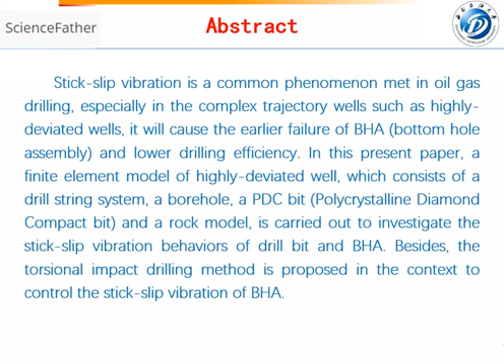Stick-slip vibration is a common phenomenon in oil and gas drilling, especially in complex trajectory wells such as highly deviated wells. It causes earlier failure of BHA and lower drilling efficiency. In this paper, a finite element model of a highly deviated well, consisting of a drill string system, a borehole, a PDC bit, and a rock model, is used to investigate the stick-slip vibration behaviors of the drill bit and BHA. Additionally, a torsional impact drilling method is proposed to control the stick-slip vibration of BHA.

Nowadays, the highly deviated drilling approach is widely used in oil and gas drilling. It breaks the limitation of drilling space, especially in offshore and beach oil exploration, and has the merits of low drilling costs and high economic benefit. A highly deviated well is a directional well where the ratio of well length to vertical well depth is larger than 2, and the deviated angle ranges from 55 to 85 degrees.

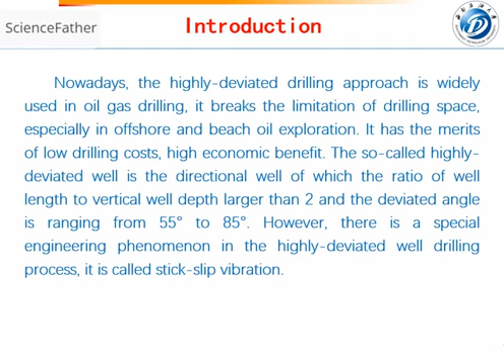However, there is a special engineering phenomenon in the highly deviated well drilling process called stick-slip vibration. That is, the drill bit stops rotation because the torque transmitted from the rotary table through the drilling string is not enough to break the bottom hole rock within a certain period of time. Subsequently, as the rotary table keeps rotating and the torque keeps transmitting to the drill bit, it abruptly rotates once enough energy is stored in the drilling string to break the rock. Stick-slip vibration of the drill string is this bit-stalling and continuous-rotation alternating cycle.

When the bit suddenly rotates, the rotation speed and acceleration are usually higher, leading to early failure of the drill bit and BHA, and causing low quality of the well borehole. It is therefore significant to investigate stick-slip vibration control approaches for improving the ROP and reducing drilling costs.

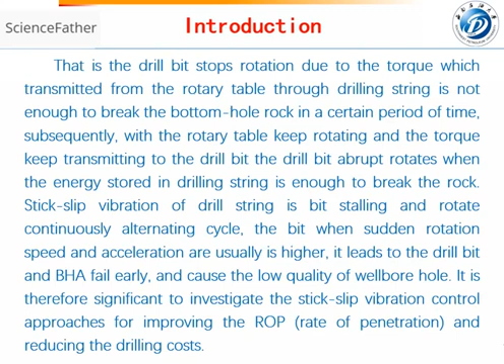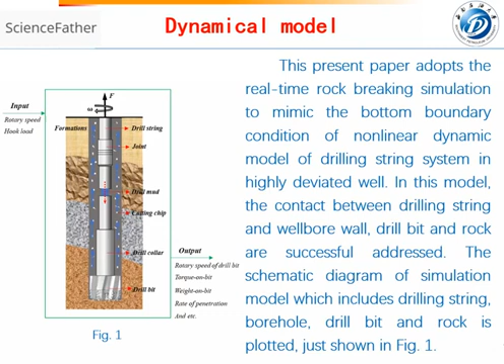This paper adopts real-time rock breaking simulation to mimic the bottom boundary condition of the nonlinear dynamic model of the drilling string system in a highly deviated well. In this model, contact between the drilling string and the wellbore wall, and between the drill bit and rock, are successfully addressed. The schematic diagram of the simulation model, including drilling string, borehole, drill bit, and rock, is shown in Figure 1.

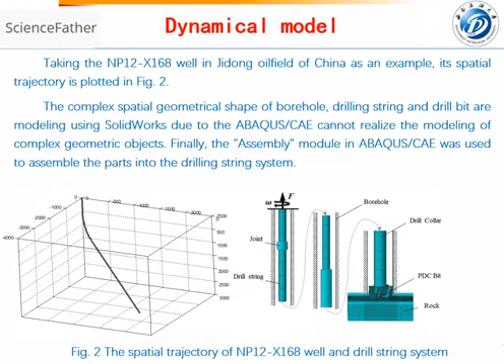Taking the NP12-X168 well in Jidong oil field of China as an example, its spatial trajectory is plotted in Figure 2. By comparing with the field monitoring data, it can be concluded that the dynamic finite element model of the highly deviated well established in this paper has certain accuracy and rationality, and can reasonably reflect the dynamic characteristics of the drill string in the actual drilling process of a highly deviated well.

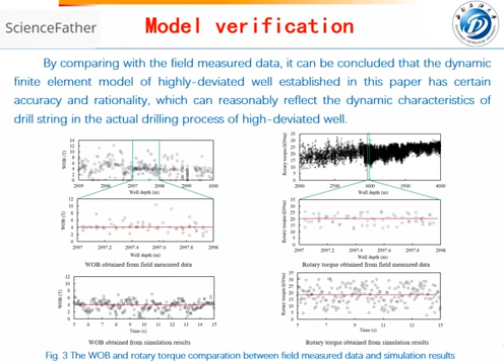When the rotation speed of the drill bit equals or is less than 0, it means the drill bit is in the stick state. During the slip state, the PDC cutter will suffer violent impact loading due to the high rotational speed of the drill bit, causing earlier failure of the cutters. Meanwhile, torque keeps transmitting to the drill bit from the rotary table, and energy is stored in the drilling string before the next slip state happens.

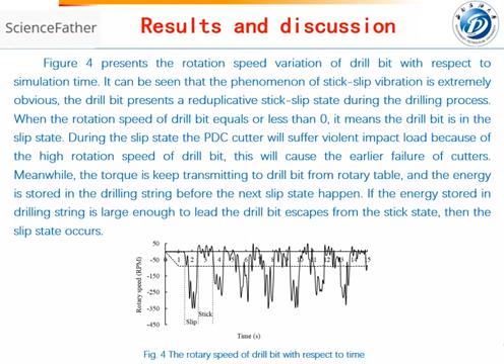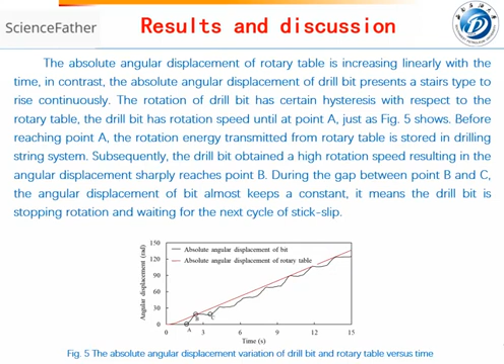If this energy stored in the drilling string is large enough to let the drill bit escape from the stick state, then the slip state occurs. The absolute angular displacement of the rotary table increases linearly with time. In contrast, the absolute angular displacement of the drill bit presents a stair-step rise. The rotation of the drill bit has certain hysteresis with respect to the rotary table.

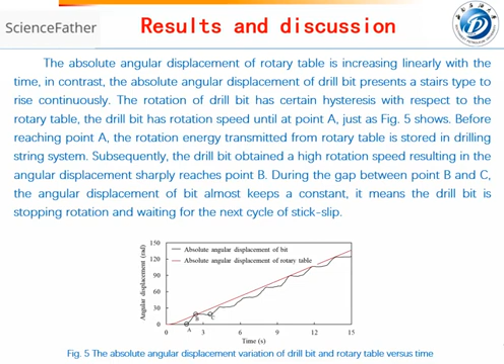The drill bit has no rotation speed until point A, as Figure 5 shows. Before reaching point A, the rotation energy transmitted from the rotary table is stored in the drilling string system. Subsequently, the drill bit obtains a high rotation speed, causing the angular displacement to sharply reach point B. During the gap between points B and C, the angular displacement of the bit almost keeps constant, meaning the drill bit has stopped rotation and is waiting for the next stick-slip cycle.

The drilling string has small deformation at the beginning of rotation, and a large deformation takes place in the subsequent rotation. It almost presents a helical buckling deformation due to the torque transmitted from top to bottom of the drill string. A large part of the energy causing stick-slip vibration of BHA is stored in the drilling string system, and this energy is the main reason for the drilling string deformation.

When the drill bit is in the stick state and without rotation, the energy stored in the drilling string system increases and the drilling string deformation becomes more obvious. In contrast, when the stored energy is released in the slip state, the drilling string deformation will be reset.

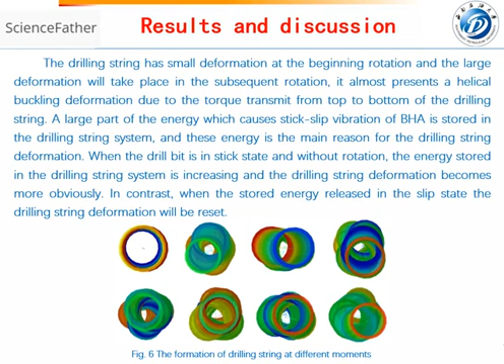Figure 7 shows the lateral acceleration variation of the drill bit with respect to simulation time, including two directions, x direction and y direction. The vibration of BHA is very complex, with different types of vibration mixed together, such as lateral vibration, axial vibration, torsional vibration, and whirling motion.

Generally, the vibration of BHA is extremely intensive. It has a great influence on the BHA working life and the wellbore stability. Figure 9 shows that the maximum lateral vibration is nearly 30 G.

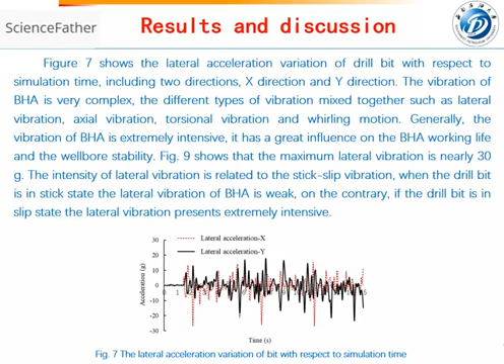The intensity of lateral vibration is related to stick-slip vibration. When the drill bit is in stick state, the lateral vibration of BHA is weak. On the contrary, if the drill bit is in slip state, the lateral vibration presents extremely intensive.

Figure 8 plots the penetration depth of drill bit with respect to simulation time. The penetration depth presents a stairs-type continuous rise, just like the curve of absolute angular displacement of drill bit in Figure 7. In stick state, the penetration depth is hard to increase and almost keeps to a constant.

However, the penetration depth sharply increases in slip state of drill bit. That means the stick state of drill bit has no contribution to the rock breaking process and will decrease the drilling efficiency. Hence, the effective drilling time should be increased by reducing the period of bit sticking in the actual drilling process.

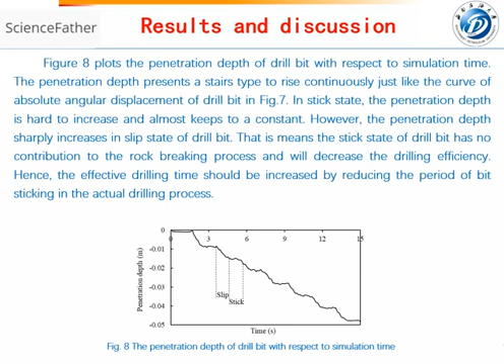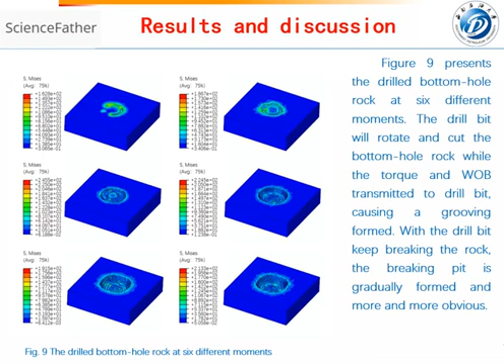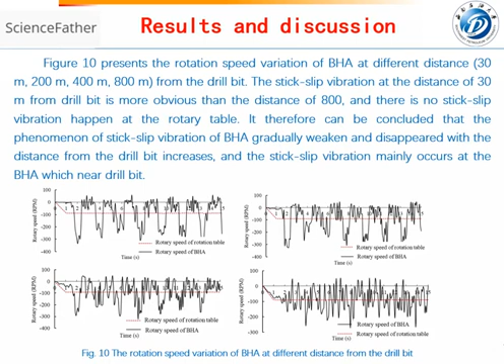30 meters, 200 meters, 400 meters, and 800 meters from the drill bit. The stick-slip vibration at the distance of 30 meters from drill bit is more obvious than the distance of 800 meters, and there is no stick-slip vibration happening at the rotary table. It therefore can be concluded that the phenomenon of stick-slip vibration of BHA gradually weakens and disappears as the distance from the drill bit increases, and stick-slip vibration mainly occurs at the BHA which is near the drill bit.

Figure 11 shows the mises stress and flexural moment nephogram of BHA. The mises stress nephogram illustrates the top drilling string suffers tensile load and BHA suffers compressive load. The flexural moment nephogram presents that the maximum flexural moment occurs at the BHA which is near the drill bit. It also means the BHA is prone to fracture.

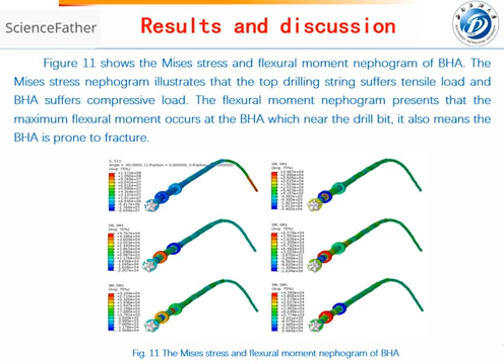Figure 12 illustrates the rotation speed variation of drill bit in torsional impact drilling and traditional drilling with respect to simulation time. The stick-slip vibration is weakened in torsional impact drilling compared to the traditional drilling. The maximum rotation speed in torsional impact drilling is 262.2 rpm and it is 350 rpm.

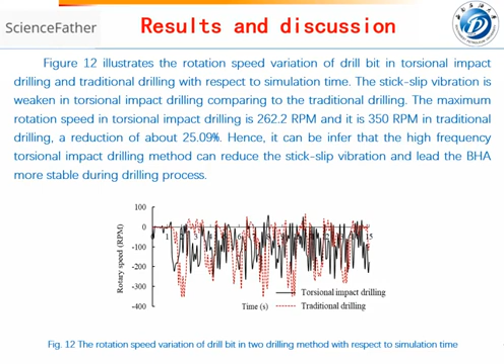In traditional drilling, a reduction of about 25.09%. Hence, it can be inferred that the high-frequency torsional impact drilling method can reduce the stick-slip vibration and lead to the BHA being more stable during the drilling process.

Figure 13 shows the angular displacement variation of drill bit in torsional impact drilling and traditional drilling. Comparing to the angular displacement curve of traditional drilling, the angular displacement curve of torsional impact drilling presents more smooth. The stairs-type continuous rise is not obvious. It also indicates that the torsional impact drilling can reduce the stick-slip vibration and lead the BHA to be more stable during the drilling process.

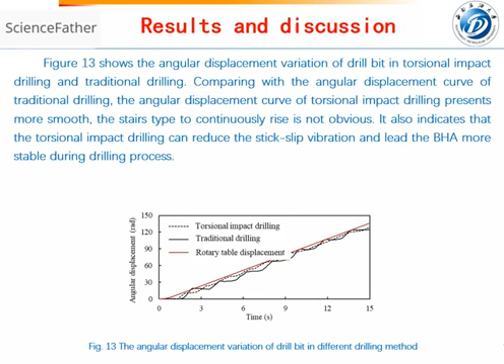Figure 14 presents the resistance torque of drill bits in torsional impact drilling and traditional drilling. The resistance torque of drill bit is reduced obviously in torsional impact drilling compared to the traditional drilling. The maximum resistance torque is reduced from 27.8 kN·m to 17.4 kN·m while using the torsional impact drilling method.

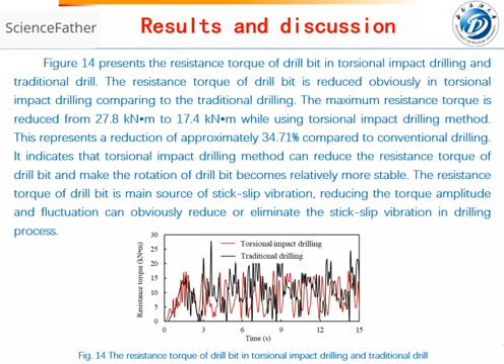It presents a reduction of approximately 34.71% compared to conventional drilling. It indicates that the torsional impact drilling method can reduce the resistance torque of drill bit and make the rotation of the drill bit become relatively more stable. The resistance torque of drill bit is the mainly source of stick-slip vibration. Reducing the torque amplitude and fluctuation can obviously eliminate the stick-slip vibration in the drilling process.

Figure 15 shows the comparison of penetration depths of drill bits in torsional impact drilling and traditional drilling. In torsional impact drilling, the penetration depth curve presents a linear growth with respect to simulation time. It is different from the stairs type of continuous rising in traditional drilling. It also can be seen from the figure that the rate of penetration in torsional drilling is larger than it is in traditional drilling. Torsional impact drilling increases the drilling depth by about

58.28% compared to traditional drilling. This means the torsional impact can effectively improve drilling efficiency.

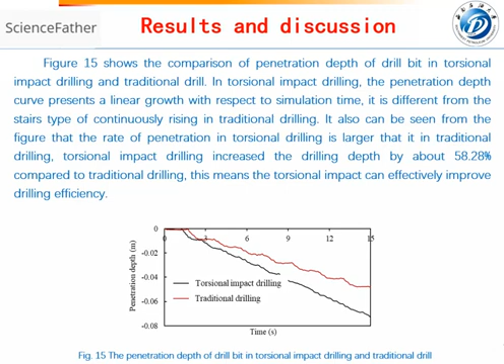The research results show that the phenomenon of stick-slip vibration of BHA gradually weakens and disappears with the distance from the drill bit increasing, and the stick-slip vibration mainly occurs at the BHA which is near the drill bit.

The high-frequency torsional impact drilling method can reduce the resistance torque of the bit by 34.71% and increase the drilling depth by about 58.28%. It can effectively improve the drilling efficiency of the bit, making the rotation of drill bit become relatively more stable, and reducing or even eliminating the stick-slip vibration.

These results lead to an enhanced understanding of stick-slip vibration behaviors of drill bit and BHA in highly deviated wells and provide the basis for improving the drilling efficiency. This is all the introduction of this paper.